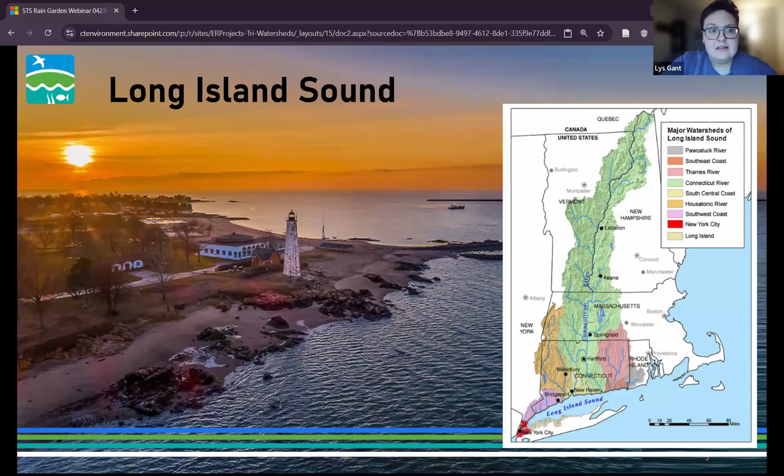So, a little bit of an orientation for you all, for those who may not know, what is a watershed and why do we care about watersheds? We all, regardless of where we live, exist within a watershed. A watershed, by definition, is an area of land that drains to a given river or other water body. For us within the great state of Connecticut, and everybody who exists within the Long Island Sound watershed, all of our water that we come in contact with, that runs across the land that we live on, all ends up in Long Island Sound.

So you may be wondering, why is protecting our watersheds important? At the forefront of our minds should be the fact that watersheds, at the end of the day, sustain life. Not only human health is impacted by our waters around us, but also ecological health. Having healthy waterways can ensure that the water around us is suitable for recreation and subsistence. Ensuring that our ecological health is robust can support ecological diversity in the environments around us. Another thing that watersheds facilitate is our $450 billion agricultural industry, which provides us with food, fiber, and manufactured goods, as well as tourism.

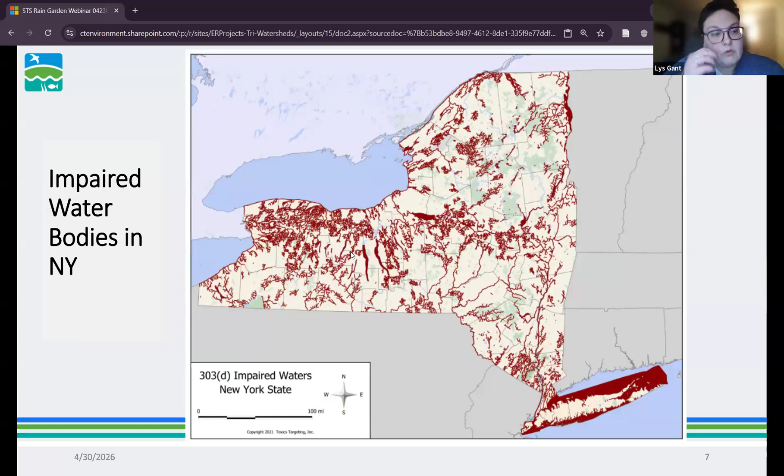And you may be wondering, what makes a water body impaired? By definition, it's a chemical, physical, or biological change which causes significant environmental degradation. When we talk chemical and biological, we're going to dive a little further into that because those are specifically impacted by stormwater. But when we talk physical, it's more along the lines of sediment, some sort of alteration to the path of a water body, whether that be a dam or reinforcement of the banks of a river. Temperature can also be a physical factor.

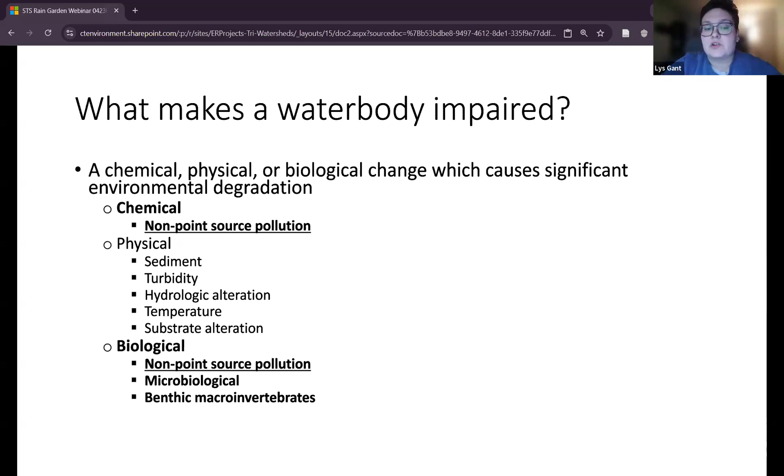But today we are specifically focusing on some of the more chemical and biological components which can impair a water body. And when we think about chemical and biological impairments, the first thing our brains go to is stormwater runoff. So some of the challenges associated with stormwater runoff are obviously water pollution. We also think about warmer stream temperatures, nutrients, localized flooding, erosion of buffers and stream channels. All of these things can serve to contribute to a degradation of the water bodies within our watershed.

When we talk about contaminants, we don't often think about the impacts that humans can have on the environment around us. When we talk about stormwater runoff, we may not realize that non-point source pollution, which is anything that comes off of the impermeable surfaces around us, is one of the number one causes of degradation of watersheds or water bodies within our watersheds in our region.

Some of the contaminants that contribute to this non-point source pollution are chlorides, so think road salts and deicers, herbicides and pesticides, nutrients which come from fertilizers but also pet waste, various auto fluids, wheel debris like tire dust, coal tar sealants that we put on our driveways and roadways, household cleaners, and then newer emerging contaminants like PFAS, PCBs, and 6-PPD quinone.

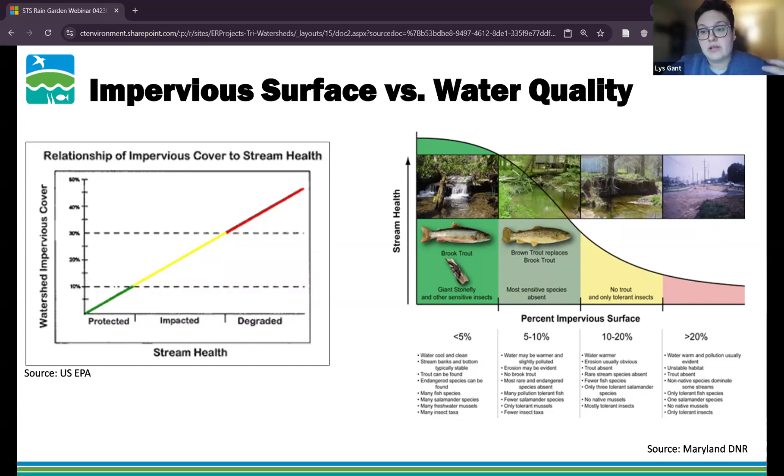These changes can lead to an overall degradation of the water environments around us over time, and the more impervious cover we have within a space, the more drastic those changes are.

So what we like to think of is when we have a rain event over a paved area, we get around 55% of the rain that falls captured in the form of runoff, which ends up in our storm drains and sewer systems, where it can capture all of those contaminants and they end up in Long Island Sound.

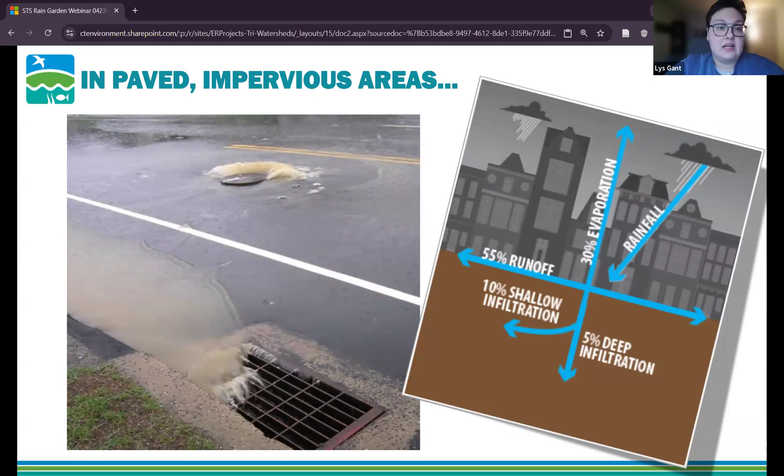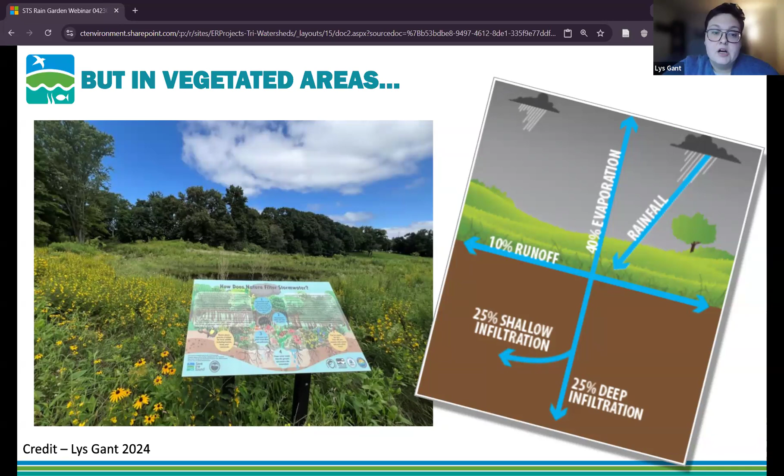However, in the inverse, if you look at a vegetated area, we may get a little bit of sheet flow and a little bit of runoff because there are plants planted in the area with the intent of capturing water. The water gets the chance to infiltrate into the groundwater layer more effectively than it would in a paved area.

Some of the challenges we experience with stormwater runoff is what we call a flashy environment. In a pre-urban system, a space where we don't have as many impervious surfaces, we see natural fluctuations in the flow of water throughout a storm event.

Another thing to be cognizant of is that in many urban places, New Haven being just one example, we exist on something called a combined sewer outfall. In the combined sewer system, we like to think of it almost like a light switch existing. On a dry day, the sewer system functions as it should; all the water gets where it needs to go, to the water treatment plant, and then it's discharged into Long Island Sound.

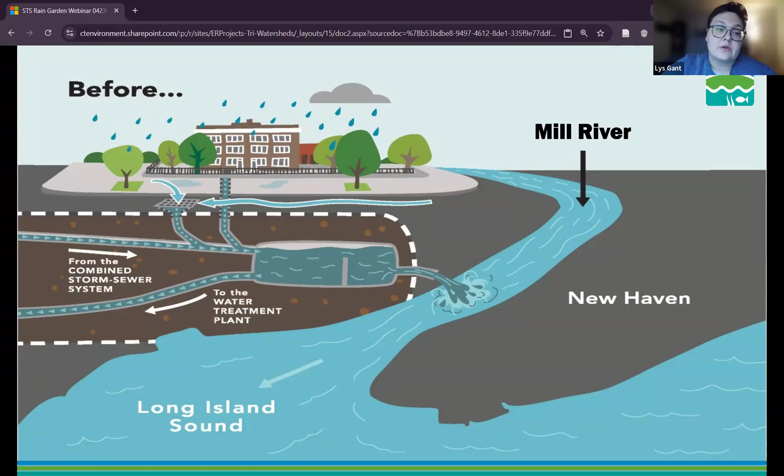So now what? What we like to do as a way of trying to problem solve some of these issues with regards to stormwater is we manage rain closer to where it falls. And how do we do that? We look at green infrastructure, which is a type of nature-based solution. A nature-based solution is a landscape feature that's meant to mimic nature, and it's used to collect and infiltrate stormwater runoff.

Essentially, at the end of the day, we're working to capture stormwater closer to where it falls and capture that first 1 inch of stormwater, which is the dirtiest water that's going to come from a flush during a storm, inside some sort of landscape feature that allows it to slowly trickle down into the groundwater layer, preventing contaminants from ending up in our water bodies.

Rain gardens come in a variety of shapes and sizes. On a residential scale, we're usually thinking of a garden connected to a disconnected downspout, redirecting it into an installed garden feature. On a municipal or larger scale, we're usually pulling stormwater off of parking lots, right-of-ways, sidewalks, or sometimes rooftops. These spaces are filled with native plants and shrubs curated specifically for the needs of the space. So how does a rain garden work?

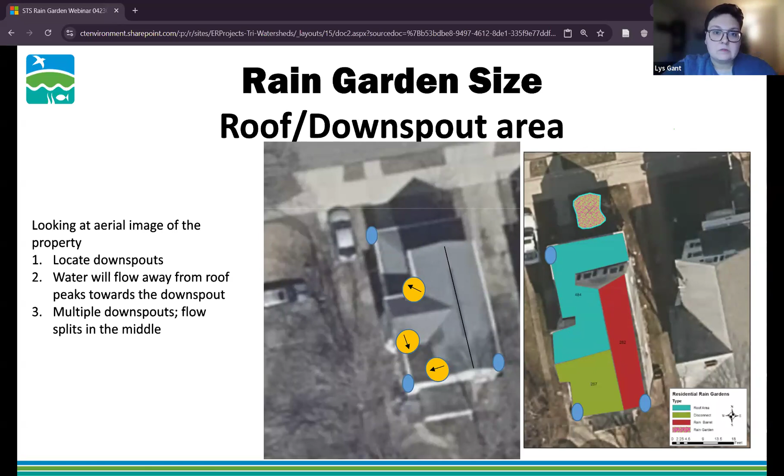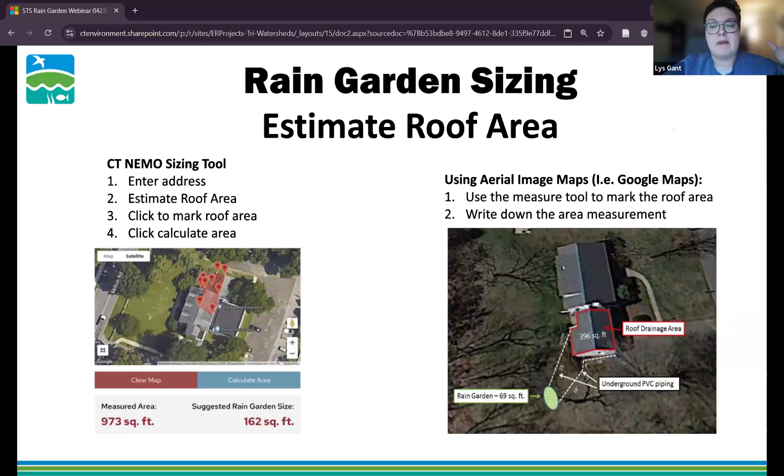When it comes to rain garden sizing, there are two ways we've done it. First, the CT NEMO sizing tool lets you pull up their rain garden app. You enter your address, estimate the roof area, mark it out, and it calculates the measured area and suggested rain garden size, which is great if you don't want to do the math. Alternatively, you can use aerial maps like Google Maps with the measure tool to get an idea of the roof area, then do a math equation to determine the best rain garden size based on the roof area you're trying to infiltrate.

If you decide to do the hard math way, you first determine the depth of your garden. Generally we use 6 to 8 inches for rain garden depth. To determine how big the garden needs to be, divide the roof area you're trying to infiltrate by the depth of the garden you're hoping to install. For example, with a 6-inch garden, you'd divide your roof area by 6 to get your garden size. Pretty easy, but if you don't want to do the math, the CT NEMO tool is incredibly helpful.

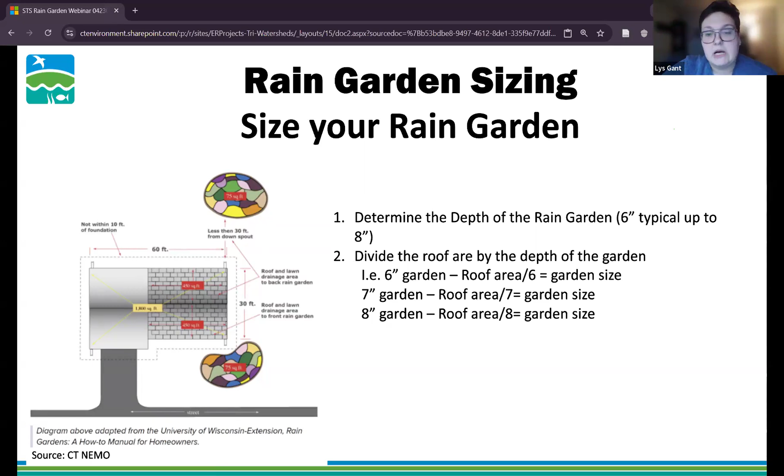When we talk about depth, we're also talking about creating a garden space that's uniformly 6 inches deep. We make sure our rain gardens function almost like a bathtub shape, with a flat bottom that's 6 inches deep at its deepest point. Depending on the topography of the property, one edge, like the front if it's sloped, might be a little higher to keep that depth an even flat 6 inches, because you don't want one edge higher than the other, otherwise you could get ponding in the garden.

Contrary to what a lot of people might think, rain gardens aren't actually meant to be wet spaces. At the end of the day they're meant to be dry. They should capture that first flush of water and then completely dry out within a 24-hour period. We don't want our rain garden to hold water like a pond; we want it to capture and infiltrate that water.

Moving on to plant selection. We take a lot of things into consideration when selecting plants for rain gardens. First and foremost, we look at native plants. There are some instances in residential gardens where someone requests something non-native, and as long as it's not invasive, we won't say no, because at the end of the day residential rain gardens are on someone's property, they'll have to look at it every day, and it's their choice what's in their garden. But generally we aim toward selecting native plants.

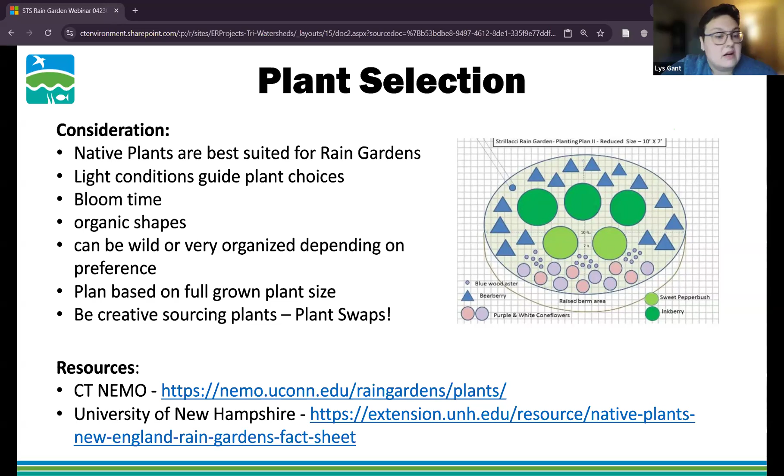Some of the plants that we generally select are first and foremost going to be plants that are really adaptable—plants that can go with more sun or less sun depending on conditions, and can tolerate having their roots wetter sometimes of the year and drier others, because Connecticut's weather is constantly shifting and adapting. Sometimes we have a really wet season, other times we're in a drought. So we select plants that are really adaptable to those factors.

We really like the milkweeds, coneflowers, wild columbine, lobelias, Joe Pye, and inkberry holly, which is wonderful because it's beneficial to birds and small mammals. Red osier dogwood is a great one because you get some winter color as well. So there's lots of things we think of when we factor in what plants we're selecting.

But I would always recommend, when selecting plants for an installation, to prioritize sun exposure first and foremost, because if you don't prioritize that sun exposure, if something doesn't do well in full shade, it's just not going to do well in full shade. I'd encourage keeping that in mind. But there are hundreds of plant options native to our area that do well in all sorts of environments, and those databases I mentioned earlier can advise on which might be the best options for you.

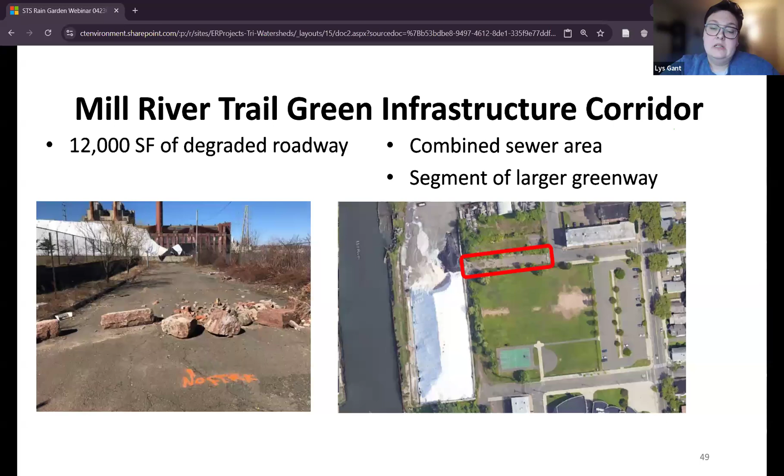First, I'll talk about the Mill River Trail Green Infrastructure Corridor, which started out as a 12,000 square foot space that was a degraded roadway. It is in the combined sewer area, and it is a segment attached to what we hope will be the fully connected Mill River Trail. The back half of the site connects to the Mill River Trail.

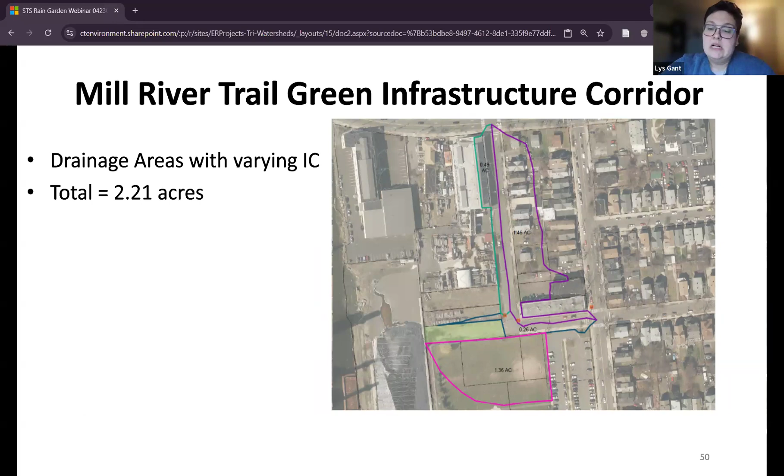This space is capturing stormwater from approximately 2.21 acres. As you can see outlined in pink, purple, and teal, those are the areas that the green highlighted space, which is the infrastructure corridor, is set to capture. There were a few iterations of this design.

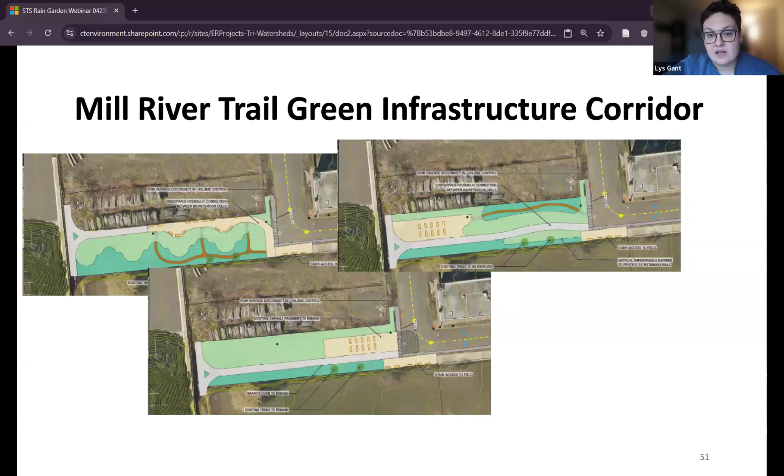We worked with Biohabitats to get this designed and implemented, and we ended up deciding on the design as you see here, with three bioretention cells, some subsurface piping to capture stormwater, a secondary bioretention area, and then an overflow connection to help with capturing surface runoff.

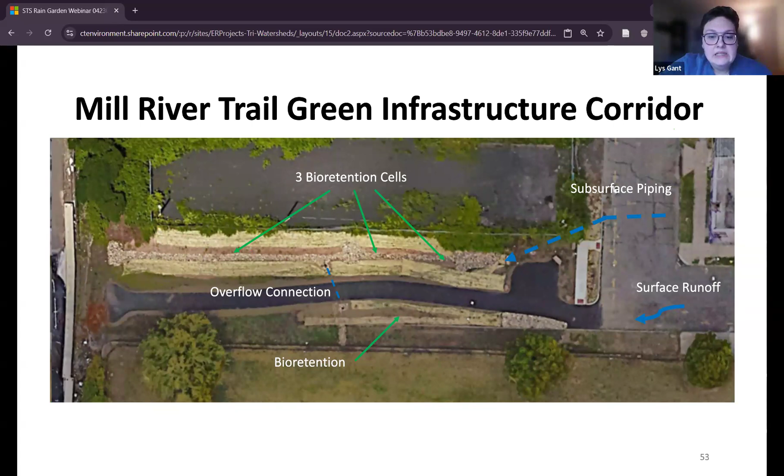This project was a lot of hard work. It entailed removing the entirety of the roadway, and putting in a really incredible installation, some green infrastructure that really had never been executed of this size in the area before.

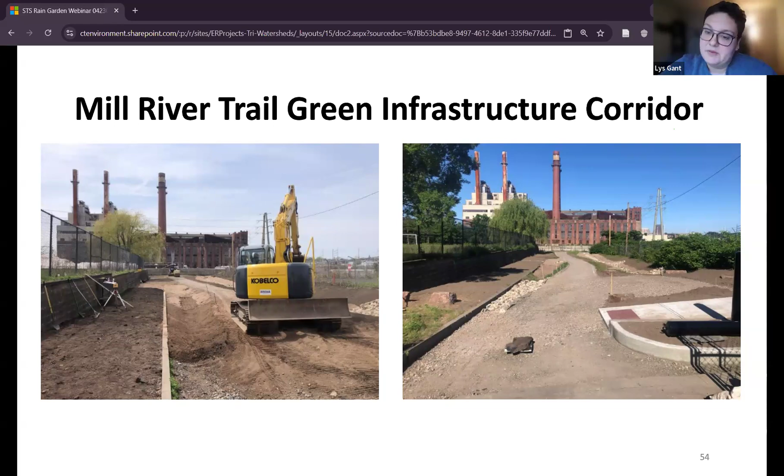Some of the challenges that we dealt with and continue to deal with when it comes to the green infrastructure corridor are, first, adjacent property conflicts. There are some continued issues with backfill on the neighboring property and changes in grade after surveying and design was complete on the site, which causes some issues with runoff.

We also deal with basically seepage from the salt pile that brings in some brackish runoff onto the site, which doesn't make the plants thrive, we'll say. But there is a salt pile that is adjacent that can impact some of the plants on site.

We also have coped with some invasive species along the property line, specifically Japanese knotweed, which is basically enemy number one when it comes to any sort of green infrastructure site. It really does love to take over sites that are disturbed soil. That is one we've been contending with specifically on this site.

We have also dealt with issues regarding maintenance and ensuring that the space is being cared for, including maintenance and dumping. The site, prior to being overhauled as a green infrastructure installation, was essentially a dead-end road that was used for dumping. That has decreased somewhat since the green infrastructure corridor had been implemented, but it fluxes depending on the season and how much exposure there is to people on the site.

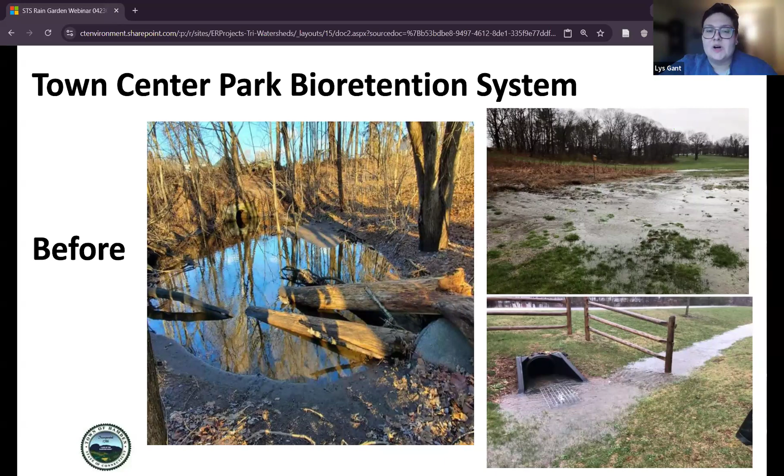Previously, before the space was turned into a bioretention system, it was essentially a park that had a sediment-filled outfall, where stormwater would basically flush through and absolutely inundate the park. So much so that during large storm events, it was turning into a lake, with white caps in the park. Eventually all that water, after sitting in the park and capturing contaminants off the roadways upstream, would drain into the Party Brook, which connects to the Mill River. So definitely something that needed to be addressed.

People at Save the Sound had a great idea of putting in a bioretention system at Town Center Park, which has a plunge pool, a regenerative stormwater conveyance by way of a series of step pools, and then 4 bioretention cells, all with the intention of capturing stormwater and preventing it from sheet flowing untreated into the Party Brook and ending up in the Mill River.

Out of the last couple years of implementation of this space, there have only been 4 overflows, which is incredible considering that during stormwater events prior, it was basically a lake every time it rained.

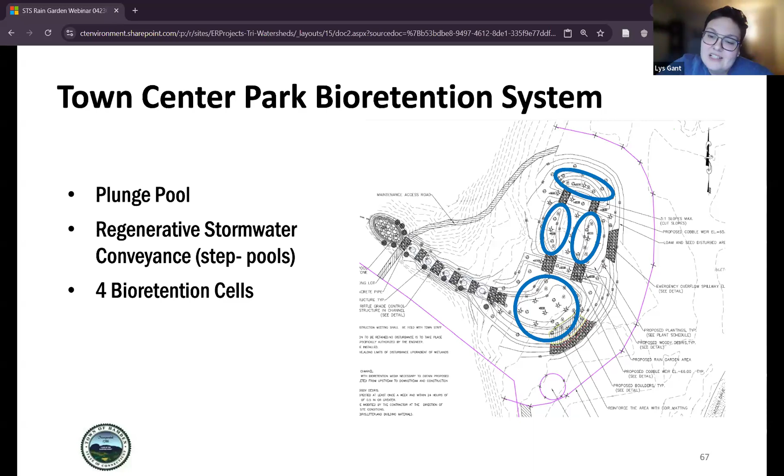It was great to watch the process and see just how much wildlife started coming back, even during the process of completing the step channels. We started seeing frogs and birds, which was really wonderful to see.

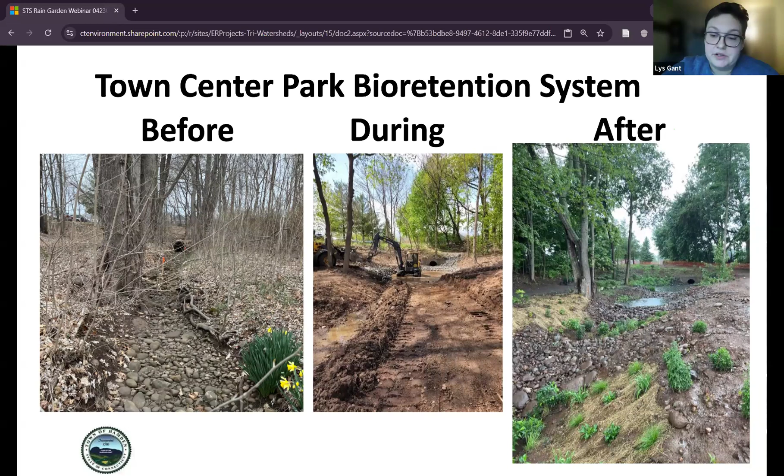This is the process of the creation of the bioretention areas. As you can see, again, before, during, and after.

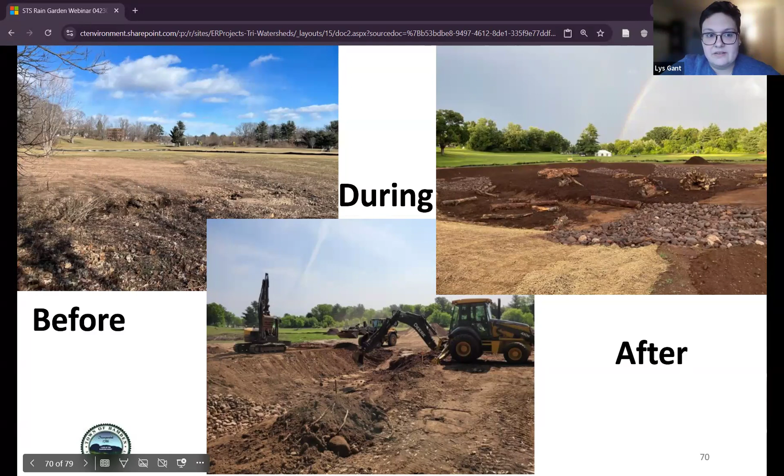This is what the space looked like upon completion. It has filled in a ton since then. But in the space, it had over 4,000 plants put in the ground, 1,500 of those put in the ground by volunteers.

Many of those volunteers had never gardened before. We got to work with volunteers from the Hamden Land Trust, Save the Sound staff, and volunteers through our organization networks. We got to work with a group from CTVIP who, like I mentioned, had never gardened before and were super passionate and excited about getting into the ground and putting plants in for us. A number of volunteer days, all an immense effort to get plants in the ground.

This is how the space has filled in in recent years. It's a really, really amazing space. It's got a ton of trees and shrubs, lots of native plants. We do deal with some intermittent issues with mugwort, which we're trying to stay on top of now to remediate that space and make sure it stays a really viable, functional space. But that is continuing work in stewardship of that space over time.

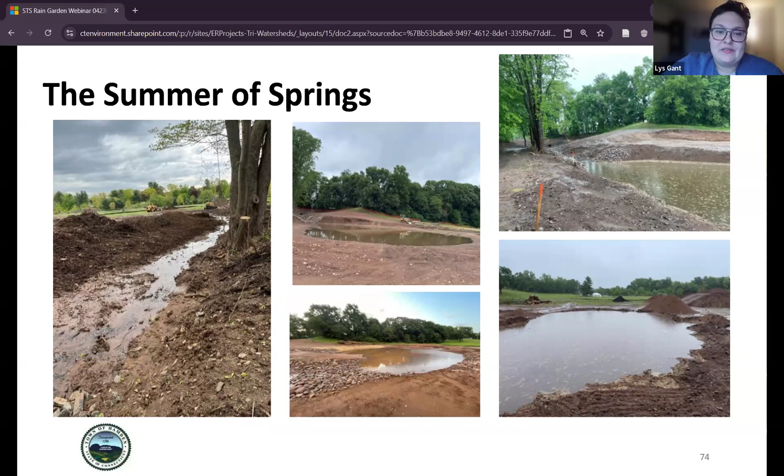What I will say is that the process for putting this bioretention area in was definitely interesting. We refer to it as the Summer of Springs. It was one of the wettest years on record for us, the year we were actually doing construction. It was difficult because it really constrained our availability for doing construction on the site, but it also allowed us to test out the durability and capacity of the space for sure. So it definitely lent to an interesting installation experience.

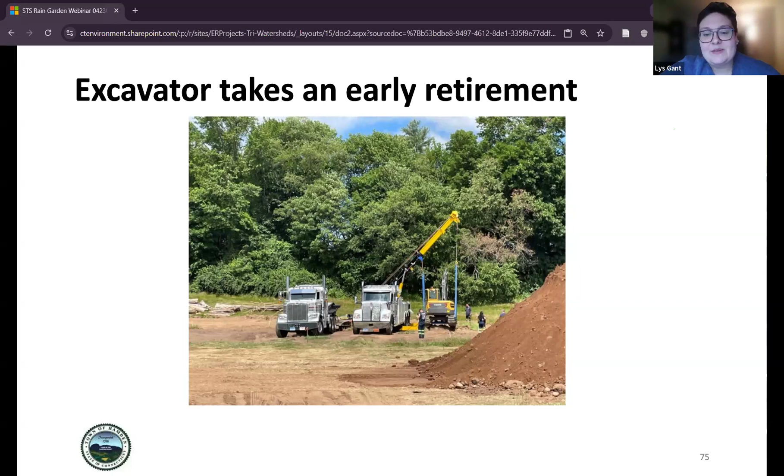It's interesting because the space, when we got into it, didn't have any active knotweed growing. But there had previously been a knotweed stand on the property that had been removed.

What happened is we dug into the ground to do the installation of this bioretention area, and once we stirred up the soil, the little tiny knotweed fragments that had been buried under the soil for years...

That led to us having to do damage control essentially, to make sure that all of that knotweed was controlled and removed before it could take over the space.

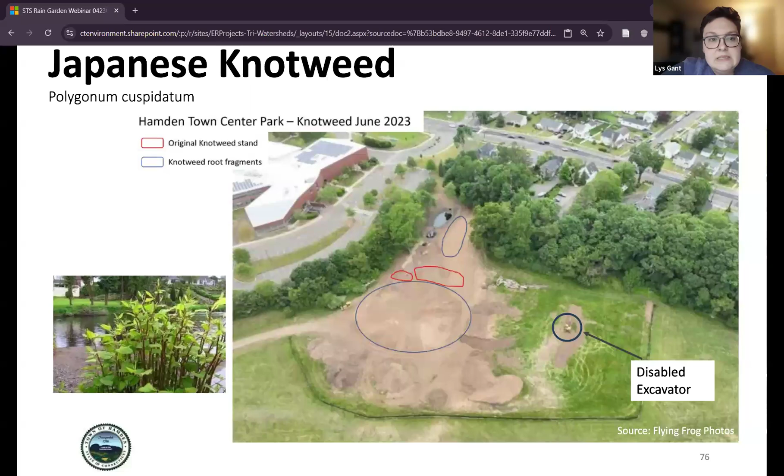But as the town engineer for Hamden says, we have to celebrate our successes. Even though some of this process was really frustrating and was a longer process than we would have hoped for, at the end of the day we ended up with a really incredible garden space, which is helping to capture a ton of stormwater off of a residential area and will hopefully thrive in this space for many, many years to come.

So looking at what's next for Save the Sound when it comes to managing stormwater or green infrastructure installation, we've got a number of things we're working on throughout the state, and as I mentioned at the beginning, moving into New York.

We have some projects in Hamden that we're working on, which also includes continued stewardship of Hamden Town Center Park. We're installing a rain garden at Alice Peck Learning Center. We're doing bioswales in the Westwoods neighborhood.

We are going to be hopefully doing some work in Branford. We are looking at doing some amazing work in Bridgeport as well. We have continued stewardship in New Haven, and we have some green stormwater infrastructure planning that we're working on in Queens with New York City Parks.

So there's a number of things happening currently with regards to stormwater and green infrastructure at Save the Sound, and I'm sure lots of opportunities to get together with us and volunteer on future opportunities. But we're constantly working to make sure that through our green infrastructure efforts, we are working to capture stormwater and protect Long Island Sound for everyone.